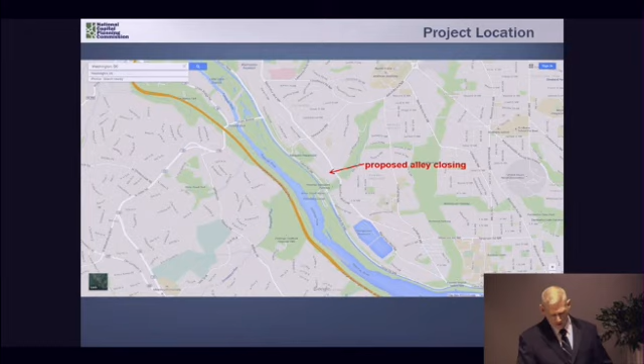The subject alley is unimproved as an alley, located in the Palisades area of Northwest Washington, a neighborhood that runs along the north side of the Potomac River, just north of Georgetown. This is an aerial of the proposed alley closing location, a neighborhood of single-family homes situated between MacArthur Boulevard and Canal Road. The alley specifically runs between Chainbridge Road and a portion of the rights-of-way of a former trolley that ran between Georgetown and Glen Echo, further up on the Potomac.

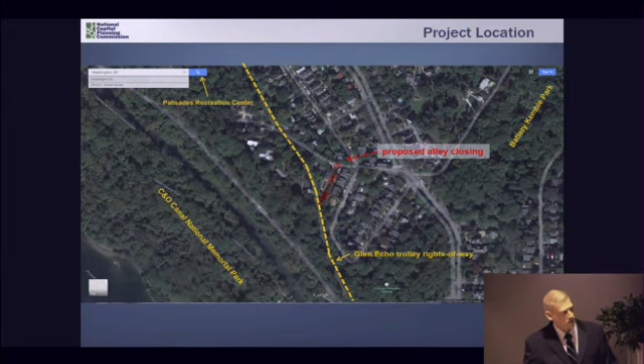This is another view, highlighting the trolley rights-of-way, which is district property, and its relation to the alley. While there are no federal properties adjacent to the proposed alley closing, the trolley rights-of-way currently provides an informal trail between the residential neighborhoods and the C&O Canal, as well as Battery Kimball Park, which are both national parks. The trolley rights-of-way also provides access to the Palisades Recreation Center, just off this aerial to the north.

Further, access to the trolley rights-of-way will not be significantly impacted, since, as I'll show in the next couple of slides, one can easily access it just a few hundred feet away on either Chainbridge Road or Sherrier Place. Finally, in terms of preservation of open space or green space, the alley today as a public rights-of-way could easily be paved over.

The closing of the alley will, however, allow the property to be incorporated into the adjacent single-family home properties. While the owners of these properties could do some things to reduce pervious surfaces or green space, they are still required to abide by regulations such as lot occupancy and setbacks, making it unlikely that this alley property will not remain open space.

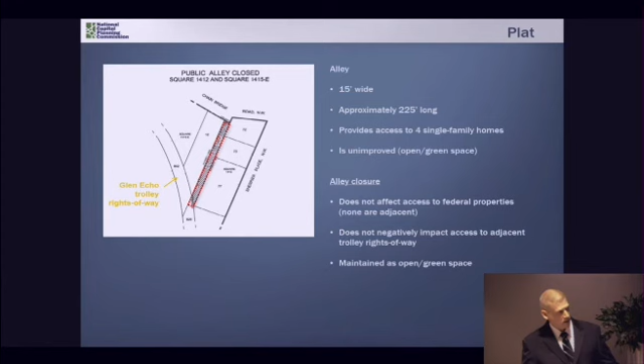So there is a lot of history associated with this proposed alley closing. However, we do have a number of people here today that will testify on this project, and we'll get into that history, so in the interest of time, I'm going to let them explain it to you.

However, from my recent observation, there's still a fence where the alley meets the trolley rights-of-way. This is an aerial view showing where the alley rights-of-way has been incorporated into the yard of the adjacent home. This is another aerial showing the same issue, if you can make that out.

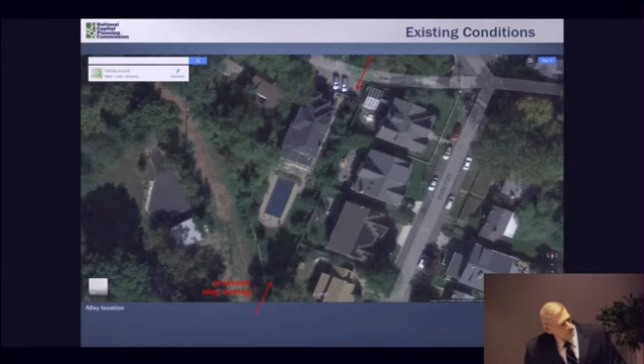So where's the fence? Can't see it. There's a fence on the lower edge where there's a red arrow, and there used to be a fence up on Chain Bridge Road, exactly where the other red arrow is. Can you go back to the last slide? Absolutely.

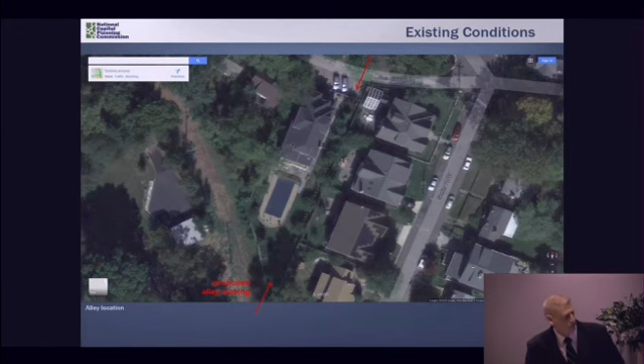Can you show us with a pointer where the other access points are? Or do they show up on this? I'll show you in the next slide or so. Okay, thanks.

And then this is just a view of the trolley right-of-way, about in the area where the alley meets it.

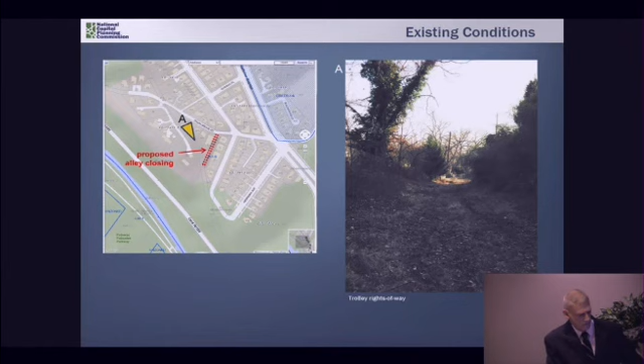And so I was just going to summarize on this slide. As I mentioned, there are no adjacent federal properties that would be impacted by the closure of the alley. Public access to the trolley right-of-way will not be impaired by the closure as well. And incorporating the alley property into the adjacent yards will tend to result in the maintenance of the current green character of the alley.

So it's with that the executive director recommends that the commission find that the proposed alley closing will not be inconsistent with a comprehensive plan for the national capital or other federal interests. So that concludes my presentation.

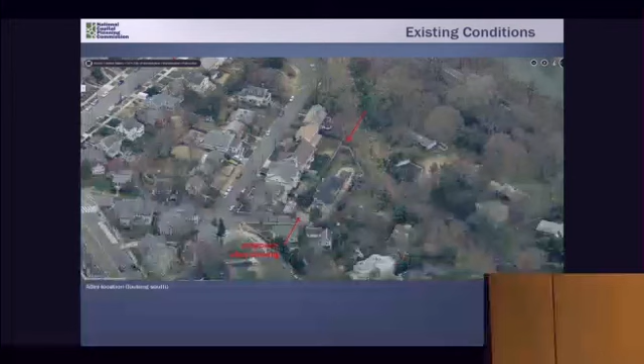Ms. White? I would just ask Mr. Hinkle to put the slide back up that shows the alley. I really appreciate the background from Commissioner Mendelson and trying to understand this situation. But it seems that the law for the closings are based on street or alley purposes. But what's fundamental to the discussion is how this was used as a trail connection. And is there a slide where it shows the trail itself or the alley itself? Because it looks... There we go. That's probably the best. Can you go back to the one before? What was the one before? Is that it right there?

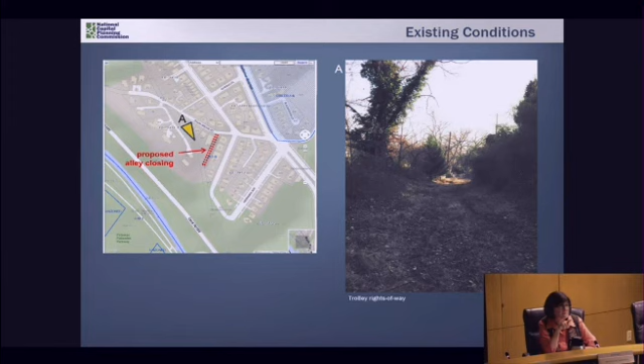We don't really have a slide of the actual alley to show how it's used. The reason I'm asking is typically with open space that's heavily used, and I understand it was unimproved, there's always a desire line and you can see where people walk. So I guess if this had come to us in the proper order, one of the questions I would have asked is how is this used? And I respect that the staff here at NCPC is always very thoughtful and looks to do their analysis on whether there's a federal interest in a very careful way.

But there's something about this that makes me look at this as I think the interpretation is a little bit too narrow and too specific, because this is a trail connection that appears from the testimony to be pretty heavily used by the neighborhood. I don't know for a fact, I haven't seen any data as to how this is used.

So from a precedent-setting perspective, it troubles me that we're taking away something. Put aside the background of how this happened or any personal benefit to the property owners, but I can imagine an adjacent property owner would never object to having control over open space. It's only a benefit to the private property owner. So while it has to remain open space, public access will be restricted to this alley, right? Correct. Okay, so to me that's a fundamental problem.

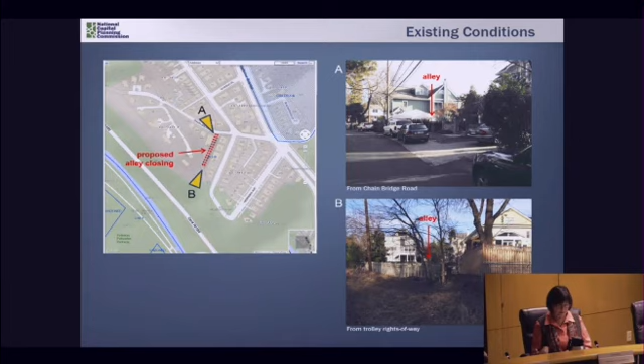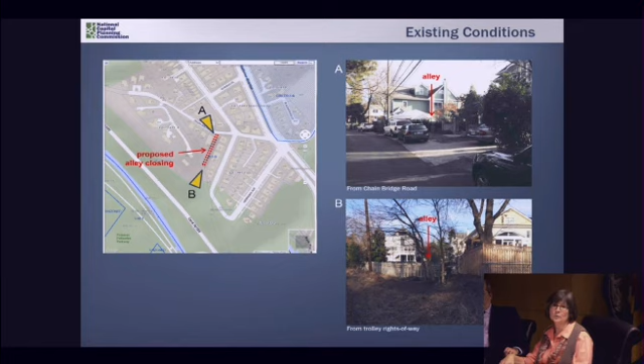And the fact that the fellow's paying a penalty, I appreciate the background on the value of the land. That's not the question for me, but there doesn't appear in any of the material that I read any plans to replace that land, whether it's as a trail connection or another open space in the neighborhood to even mitigate the impact of taking away the public land, right? Am I right in that, or did I miss something?

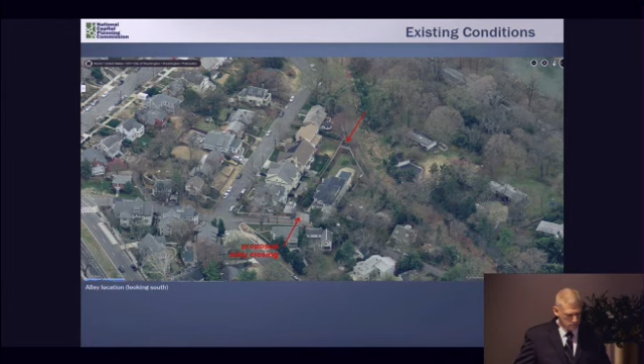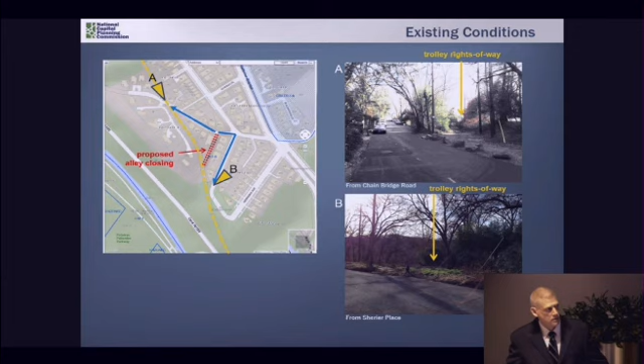So that would be point B on this graphic. And then there's also from Chain Bridge Road, which is marked as point A. The trail actually crosses Chain Bridge Road, so you can access the trail from that point. These are actually approximately about 150 feet away. It took me 1 minute to walk from where the proposed alley closing meets Chain Bridge Road, which is towards the north, to walk to point B and access the trolley right-of-way at that point.

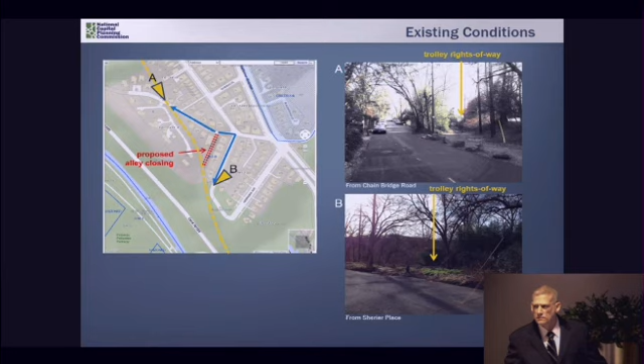Let me speak to that as well, if I may. There was conflicting testimony before the council about whether this alley was used as access to that trolley line, the trolley right-of-way. There was some testimony that there had been construction debris in there. The construction debris, if that's true, would have dated back to around 2008. And there was conflicting testimony whether it was used as access before then. Of course, before then, there were not the 4 houses that exist today.

I've been out there myself several times, and if you go to page 6 of the EDR, you'll see a photograph that's somewhat like what's being displayed. It's not a very great distance down Chain Bridge Road to the access point that I guess is A on what's being shown, and it's not a very great distance down Sherrier Place. And this is a very local area. People who are using there would be a few people from the neighborhood who would access the trolley line here.

There are many places along the length of the trolley line that people would access it. In other words, if you want to access the trolley line, you probably would not go to the corner of Chain Bridge Road and Sherrier Place. It would be the people who live in that immediate neighborhood who would be there. And it isn't a very far walk to either access point. But in any event, the testimony before the council was very conflicting with regard to whether people had in the past used this alley to access the right-of-way.

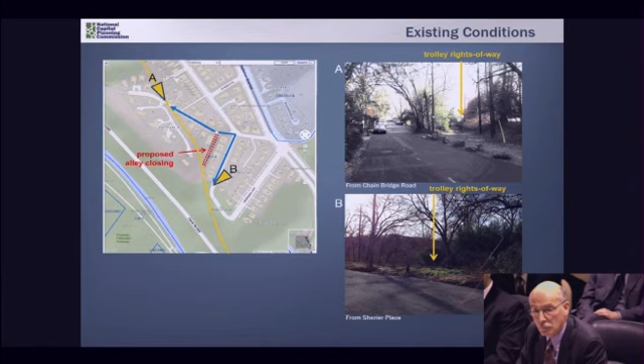What is the National Park Service interest? Generally speaking, what we see in green is close to the park service area, and the trolley line actually does cut through it, and we don't own that trolley line as it goes through the property toward Canal Road. So it's somewhat distant from the actual... You have no adjacent interest? It's not immediately adjacent to the alley, no. Okay, thank you.

Mr. May, did you have?

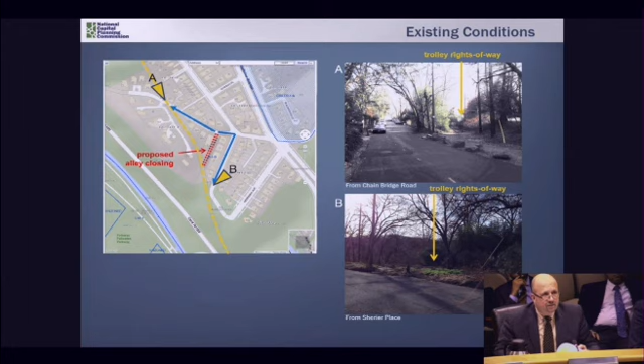As upsetting as it is as a resident to see something like this occur, to see somebody claiming public property for their own, that's not really the matter before us. The matter before us is whether there's a federal interest affected, and is there a reason for us to disapprove it based on some adverse impact on a federal interest. This isn't even a question of whether the council acted properly, although I appreciate understanding the case better as explained by Chairman Mendelson. It's very hard for me to see any adverse impact on a federal interest. I know it's proximate to parkland, but this was an alley.

It was a paper alley, but it was established as an alley, and the council's threshold is whether it's needed for alley purposes anymore, and the answer was no. This very well could have been a paved alley from our perspective, and if something happened there and there was going to be runoff onto parkland or something like that, maybe there would be some adverse condition we'd want to be prepared for. But that's not the case here, and I don't see any real potential for an adverse impact. Even if something were to grow out of the homeowner's use of that property, those are all conditions that would have to be mitigated anyway, for building code and environmental code purposes and so on.

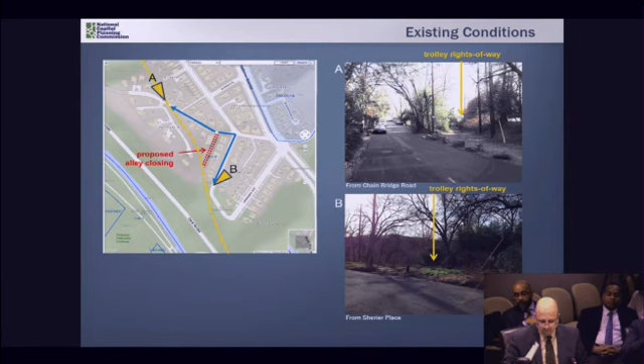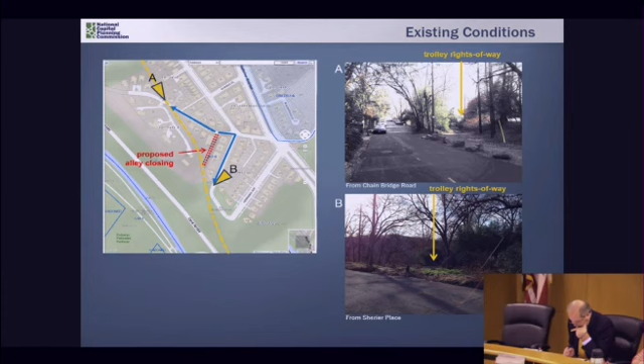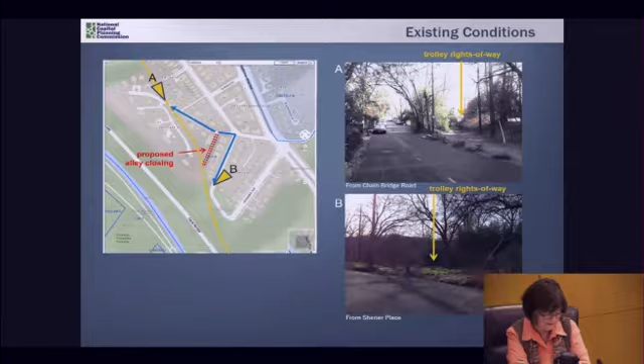I guess I just feel the need to make a statement looking at the EDR on page 5. Under analysis, paragraph 2, it talks about the federal elements of the comprehensive plan, including proposed alley closings within the district. The comprehensive plan within the parks and open space element does promote the provision and maintenance of public access to open space areas of particular interest or usefulness, with an emphasis on planning, completing, and maintaining connections between public parks and open space.

I appreciate what's being said here, and it's a value judgment, in my opinion, on whether there's a federal interest. I think what's troubling is that we talk about maintaining connections, and you are taking away a connection. I appreciate there's probably conflicting testimony about how that connection is used, but there's no data and there's no replacement. So based on that, I can't support the EDR, just on principle. I just wanted to make that clear.

Without further comment, is there a motion on the EDR? I'll move to approve the EDR. The EDR has been moved and seconded. Hearing no additional comment, all in favor of the EDR say aye. Aye. Opposed, no. No. One no, Ms. White. Abstain. One abstention, Mr. Dennis.

Thank you. The second item on our agenda is item 4B. Four B is the master plan for the Pentagon Reservation, and Mr. Carlton Hart is with us.

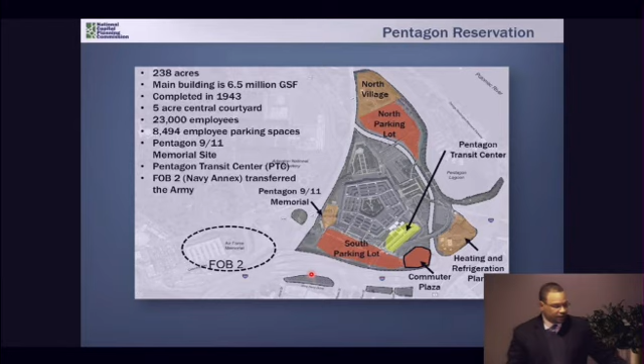The Pentagon 9/11 Memorial, which is to the west of the Pentagon building, and the heating and refrigeration plant, which is the power plant for heating the Pentagon reservation. I'll also note some parking lots that are south of 395 and south of the southern portion of the installation, and finally identify the area known as FOB 2, the Federal Office Building 2, also known as the Navy Annex. It was transferred to the Army and will become part of Arlington National Cemetery in the future.

The last master plan adopted by the Commission was in 2005. That master plan is shown here, and it had two main objectives: the first was to complete the permanent security perimeter for the reservation, and the second was to implement enhanced sustainable strategies to promote long-term environmental health of the reservation and its surroundings.

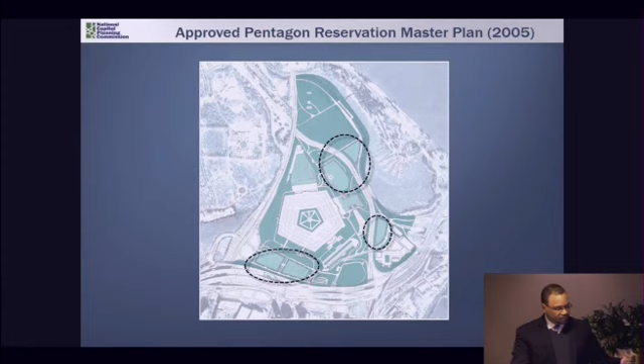The major moves in this master plan were the creation of parking garages, which I've highlighted and circled here. These were done in an effort to convert some of the land around the Pentagon into open space. The North Village and North parking lot were converted into green open space, and the top levels of the parking garages—1, 2, 3, 4 and 5—would also be made into green space with green roofs.

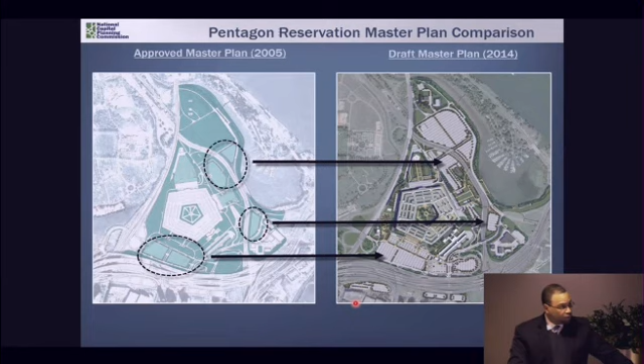The staff would like to note an easy comparison between the two plans. The major difference is that the Washington Headquarters Services, or WHS, is no longer proposing these parking garages, and instead is looking to use low impact development, or LID, to provide stormwater management. Because the parking garages are no longer being proposed, there were about 60 acres of additional open space with the green roofs and conversion of parking spaces that would not be included in the 2014 master plan. There are 6 acres of open space being proposed, which I'll discuss in an upcoming slide. I wanted to note that as the major change between the two plans.

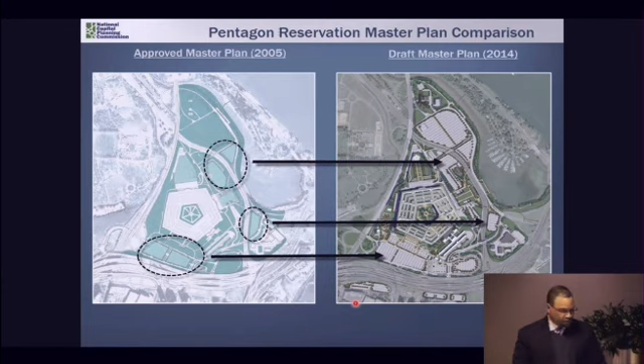The Commission approved the 2005 master plan a little less than 10 years ago. The comments the Commission made at that point are summarized here. The Commission approved the master plan but not the Transportation Management Plan, or TMP, because it did not meet the 1 to 4 parking ratio required for this facility. The Commission required DoD to submit a revised TMP showing how it would meet the 1 to 4 parking ratio, or explain why it could not be met.

Staff notes that a new TMP has been submitted with this draft master plan, and the 1 to 4 parking ratio is not met in the new TMP. There is a short explanation about what the new proposed parking ratio is going to be, and I'll describe that in an upcoming slide.

The Commission supported and commended DoD for reducing impervious surfaces in the 2005 plan by replacing surface parking with parking garages, and requested that the phased planning to convert the north parking lot to open space be moved to an earlier phase. There was phased planning associated with that 2005 master plan, but unfortunately the WHS is no longer pursuing these parking garages, due to cost and budget constraints.

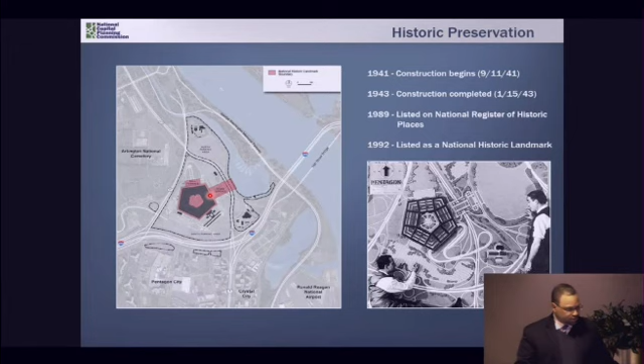Just to give you a little bit of some long views - understanding that views of the Pentagon are important, and obstruction of these views is something that WHS seeks to minimize, to protect the integrity of the historic resource.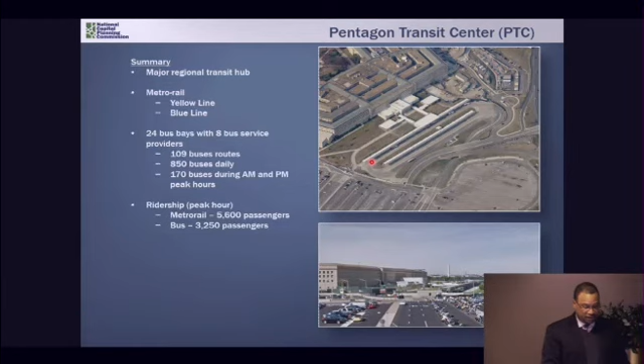For the roadway network around the Pentagon reservation - I-395 is directly to the south of the reservation. To the west is Route 27, or Washington Boulevard. Cutting through the reservation is Route 110, which connects down into Crystal City. And then to the far east is the George Washington Memorial Parkway, which is a National Park Service property.

Some local roads as well connect north and south, as well as connecting to Arlington - Joyce Street, Hayes, Fern, and Eads Streets. There is another local road that actually crosses through the Pentagon Reservation, and that's Boundary Channel Drive. It connects underneath 395 to an Arlington County park known as Long Bridge Park, which has been partially developed with recreation fields on the southern portion, and an aquatic center being planned for the northern portion.

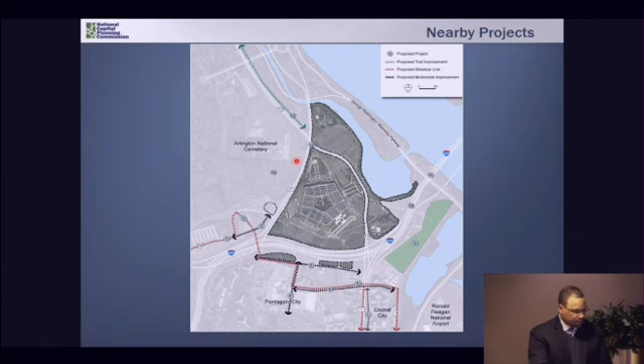And I also - I've already mentioned the Arlington National Cemetery master plan that has been submitted to the commission.

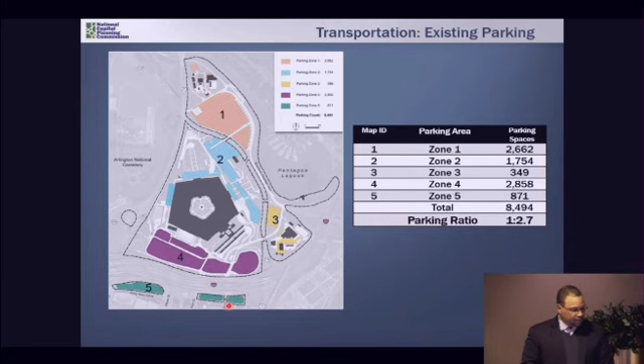Before we move on, let me ask a quick question on parking. Going from 1 to 3 to 1 to 4, the 1,295 spaces, is that based on the 1 to 3, or is that assuming the 1 to 4?

The 1,295 is actually less than that. They haven't given us what the 1 to 4 is, but we can calculate it, and I have calculated that. That's more like 2,700 parking spaces that they would need to go down from the existing 8,500. What they are doing is going down to almost 1,300 parking spaces, which will get them to a 1 to 3.2. So they won't actually get to the 1 to 4 even with the reduction they are proposing now. Okay, I see.

For the existing parking, another piece that WHS has noted is that the Pentagon does do some event staging, and these large parking lots are used for events such as Rolling Thunder, the Marine Corps Marathon, and the presidential inaugural parade setup. So there are some reasons why the Pentagon is looking at maintaining some of these large areas for those events.

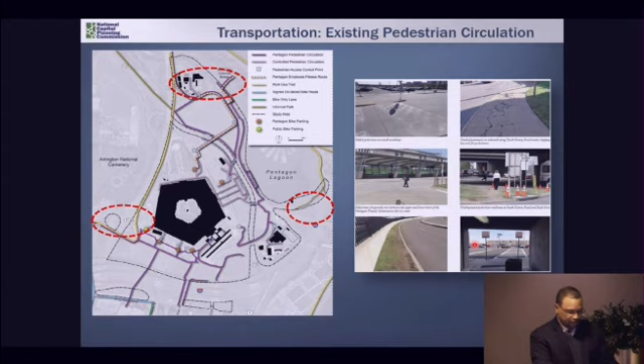This image is just showing the poor pedestrian amenities and conditions that currently exist at the Pentagon. Again, that was one of the main points for the master plan update: to improve pedestrian connections and make them safe, as well as improving some vehicular conflicts.

For the draft master plan, similar to the 2005 master plan, the 2014 draft is intended to improve security, enhance environmental sustainability on the reservation, and enhance the quality of life for employees, as well as address accommodations for visitors to the Pentagon and other public facilities on the reservation grounds, like the 9/11 Memorial.

These projects are being proposed in an effort to balance the various planning factors on the reservation, including funding, security, safety, public access, historic preservation, neighborliness, and sustainability.

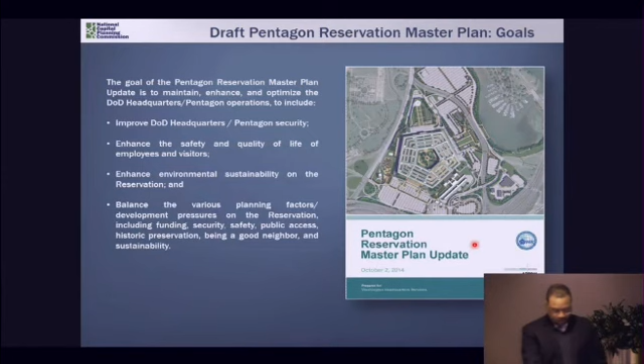These 22 projects are separated into a few topic areas. Some are security projects, some are environmental and sustainability projects, some are quality of life projects, and they include things like pedestrian and bike improvements, vehicular safety improvements, and infrastructure and support improvements as well.

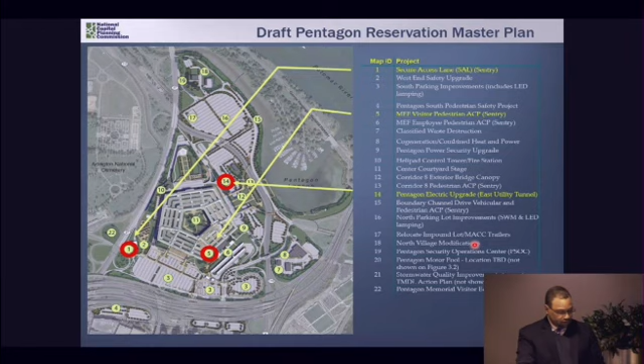In an effort to summarize the master plan, I've looked to combine the staff analysis with the master plan, so I'll provide some commentary on these elements as we move through. I've also discussed the previous commission action fairly early in the presentation. The comprehensive plan compliance is really focused on the one-to-four parking ratio, as well as environmental protection of sensitive areas, and I also talk about some specific projects in a little more detail.

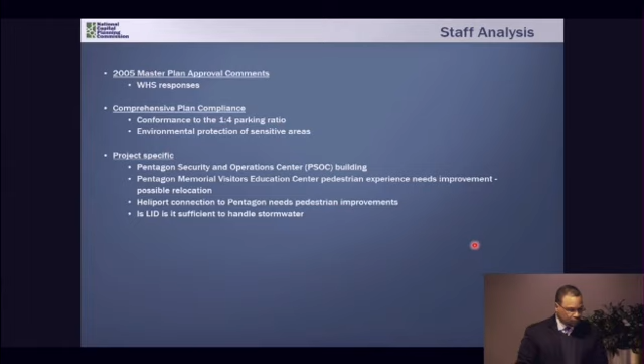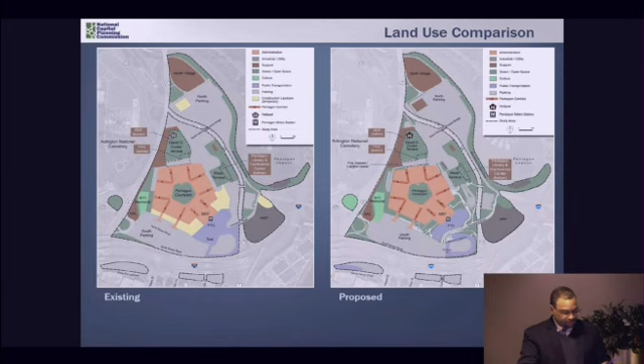The other change is around the commuter plaza, which I was talking about earlier. There's a routing for buses and cars that has been proposed for the master plan that will make a fairly significant change in that location. For transit, I'll show in the next slide what the commuter plaza will look like, since that's really the main change, down in this location.

This image shows the change being proposed. Currently the buses, as they move through, come off of 395 onto Eads Street, and when they move through this area there's a conflict point, as well as a conflict point with pedestrians needing to cross from the commuter plaza to the Pentagon Transit Center, or the PTC. The Pentagon WHS is looking to separate these two things, having the buses route around and then underneath to the PTC, while cars would move through here and into this area to drop off and pick up passengers, then go back onto 395.

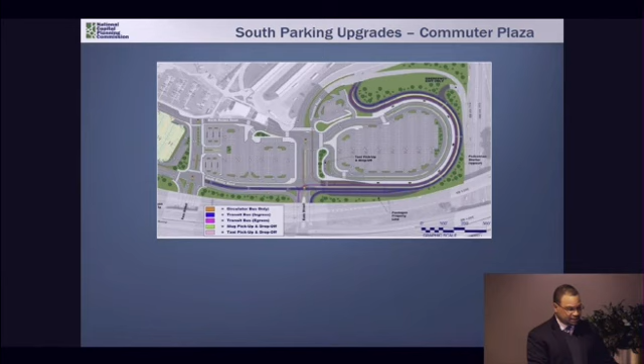There are quite a few pedestrian amenities as well, better crosswalks, more clearly delineated and defined trees, and landscaping that's included. There's also some LID proposed for the project that would be included in the plan.

For the pedestrian and bicycle amenities, the major changes are the connections I noted before. There's now a connection between the Mount Vernon Trail and Boundary Channel Drive, a public connection across this bridge onto Lady Bird Johnson Park, and a realigning of the connection along Route 27 for a multi-use trail that currently exists. The plan also includes better circulation for employees wanting to fitness train, since fitness is a big aspect of life at the Pentagon, and also for bicycles moving around the installation.

We're looking at installing bike lanes and on-street bike facilities as well.

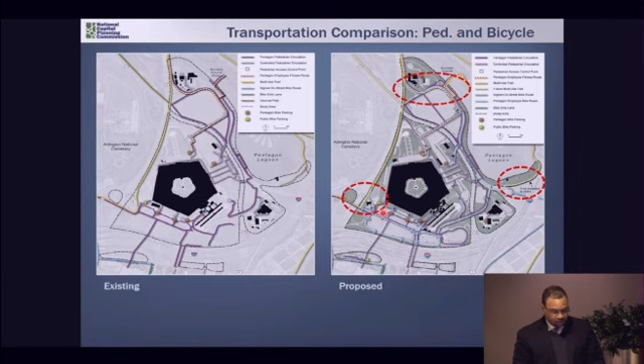The Virginia Department of Transportation provided comments on the master plan, noting among other things that a connection between Lady Bird Johnson Park and Route 27 for pedestrians is something that should be pursued. Also, the identification of the Pentagon Memorial Visitor Center, located here, and I'll discuss that in an upcoming slide—connections and pedestrian access to that, and the siting of that, was discussed in the comments from VDOT. The full comments from VDOT have been provided and are in an appendix at the back of the EDR.

The draft master plan is proposing an improvement to the parking ratio, and Chairman Bryant, your question was here—this is what they are looking to do. The existing ratio is 84.94, and the proposed under the master plan in the 20-year horizon is 71.99, so there is a reduction in the number of spaces. That reduction is basically in the south parking lot, and you can't read the numbers here, but it's because of some of the pedestrian amenities being proposed, as well as the reconfiguration of the commuter plaza. There's also a change in the Army Navy Drive parking lot on the west side.

The Army, or WHS, is proposing a tour bus drop-off for visitors to the 9/11 Memorial at the Pentagon at this location. There's an underground tunnel that connects under 395, and the 9/11 Memorial is located in this vicinity.

In neither master plan does WHS propose to meet the 1-to-4 parking ratio, and I wanted to make that clear. WHS's explanation is that they're thinking they're more similar to other federal installations in the suburbs near transit, which under the comp plan would require a 1-to-3 parking ratio. In the comp plan, all of Arlington County is considered part of the historic District of Columbia boundary, so it's within the diamond.

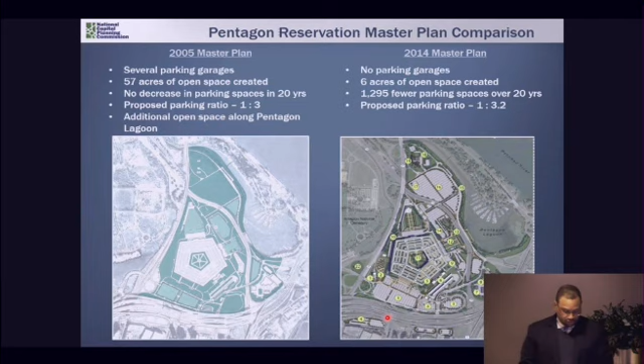Staff doesn't agree with the statement that it needs a 1-to-3 parking ratio, because as I noted earlier, there is significant access to transit as well as a strong transportation infrastructure at and around the Pentagon, which will accommodate alternative modes of transportation to commute there. These reasons provide strong justification for the 1-to-4 parking ratio stipulated in the comp plan.

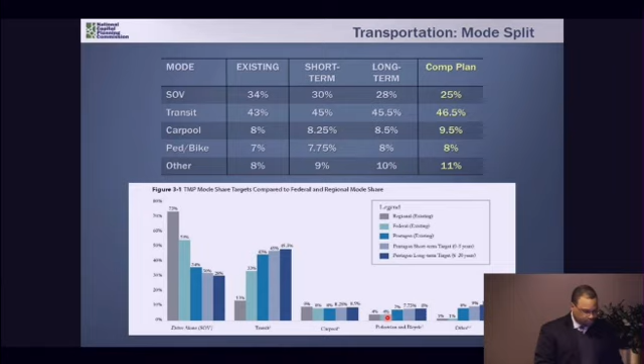The Washington Headquarters Services does provide information about their mode split. Staff understands that the Pentagon has already developed ways to promote alternative commuting, and we applaud them for doing a pretty good job so far. It has one of the lower single occupancy vehicle, or SOV, mode shares.

On this chart, the blue middle line is what the Pentagon provides now. The line directly to the left is what general federal facilities provide, about 54% SOV, and the region as a whole has an SOV of 72-73%. So they're pretty low with respect to that, but the comp plan is looking for them to reach the 1-to-4 parking ratio, which would mean an SOV mode split of 25%. Staff has provided what that mode split might look like, showing the 25% and the other corresponding splits.

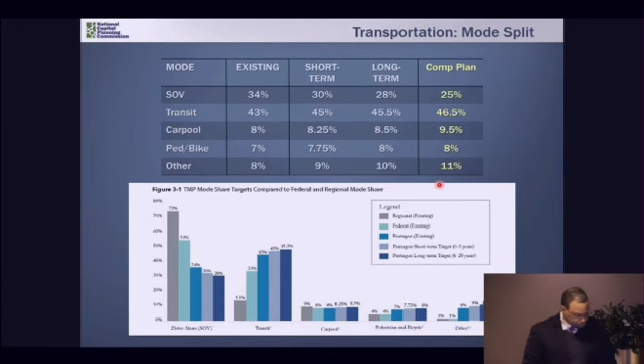WHS is also proposing to implement a number of low-impact development measures around the reservation in an effort to reduce stormwater impact on the Pentagon Lagoon, the Pentagon, and the Potomac River. WHS notes these measures will allow the Pentagon to conform with applicable laws such as the EISA and Executive Order 13514 and others.

The master plan did not describe how these measures would be as effective as those in the master plan approved in 2005, and staff would ask that we understand the difference between the two master plans. There were nearly 60 acres of open space proposed in 2005; that's gone down to 6 acres of additional open space conversion, and staff would like to understand what that difference will mean in terms of stormwater protection or management.

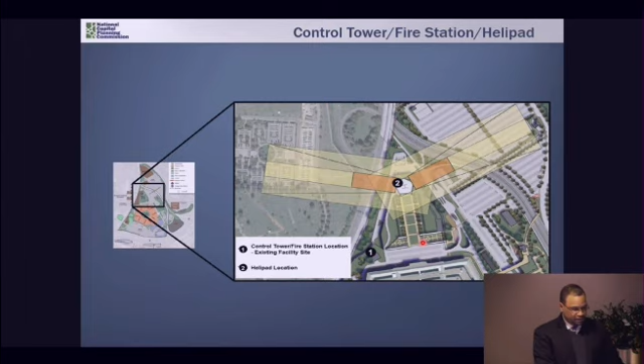For the next few slides, I'll discuss the proposed projects around the reservation in more detail. WHS has proposed a new control tower and fire station for the helipad located north of the Pentagon. While supportive of the project and its location, staff would recommend that WHS explore a better pedestrian connection—there's a parking lot to the south of the helipad—making a better pedestrian connection in line with other pedestrian improvements around the Pentagon, and address that in the final draft master plan when it is submitted to us.

The applicant has also proposed the Pentagon Security and Operations Center, also known as PSOC. This 26,000 square foot facility will be the home of the Pentagon Force Protection Agency. It will house a gun range, K-9 facility units, and other support facilities.

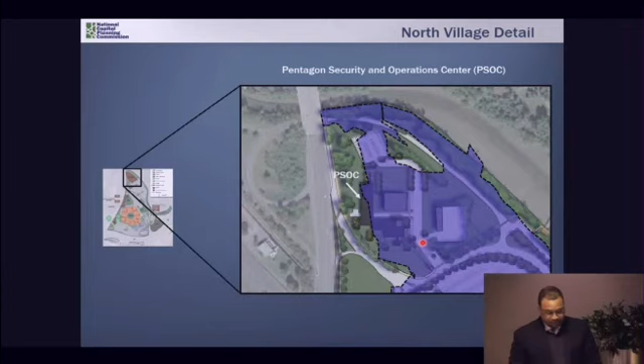Staff understands that the facility will be constructed, as I noted earlier, in the 500-year floodplain, and staff would like to understand if this facility can be sited to reduce its impact on the floodplain, or sited in a different location on the reservation to protect the sensitive floodplain area. Along with that, staff would also like to understand how WHS plans to protect sensitive areas on the reservation, particularly the 500-year floodplain.

I spoke earlier about the 2005 master plan that had removed a lot of the impervious surface here, as well as the support facilities up on the North Village and the North parking lot. Since these conversions are no longer in the plan, staff is interested in understanding how these areas will be protected through the use of low impact development. I'd like to note that we do support the removal of the 1,300 spaces proposed in this draft plan, and encourage the applicant to explore removal of additional parking spaces, focusing on protecting environmentally sensitive areas, in order to help WHS meet its 1-to-4 parking ratio goal.

And so with the removal, if there could be additional removal of parking spaces, there's a way to do that in the north parking area. That's what that kind of boils down to.

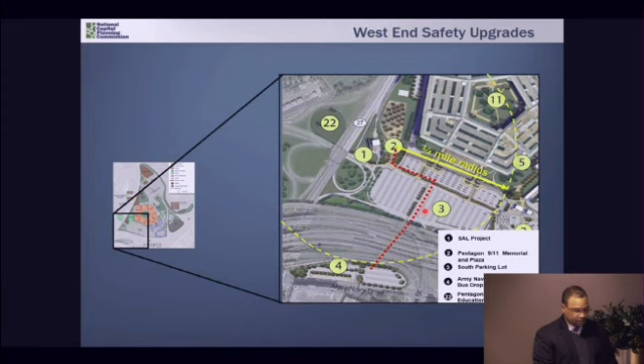And for that reason, we would like to work with the Washington Headquarters Services to see if we could find possibly an alternative location for this center that is more appropriate, either in closer proximity to the site, or the bus parking area, which is to the south here, to improve the visitor experience to the 9/11 Memorial. So co-locating what is being proposed here, down here possibly, is a possibility in the future, but we look forward to working with the Washington Headquarters Services to determine that.

And with that, it's the Executive Director's recommendation that the Commission support the draft 2014 Pentagon Reservation Master Plan goals of improving security, enhancing pedestrian amenities, reducing vehicular conflicts, and enhancing environmental sustainability at the Pentagon Reservation, and notes that no parking structures are included in this draft master plan.

Also notes that the 2005 master plan did not propose a reduction in the number of vehicles, but did increase the amount of open space. The 2014 plan proposed a reduction in parking spaces by almost 1,300 spaces and increased the open space by 6 acres.

Also notes that while the draft 2014 master plan proposed a reduction in employee parking, it does not reach the applicable comprehensive plan parking ratio goal of 1 space per 4 employees, and therefore requests that the applicant work with NCPC staff to identify locations for additional long-term opportunities to eliminate parking, preferably focused on locations that would increase open space within delineated floodplain areas north of the Pentagon Reservation and in proximity to the Potomac River and Pentagon Lagoon.

And we provide the following comments on the draft 2014 master plan and request that the applicant address these comments prior to submitting the final master plan for commission review.

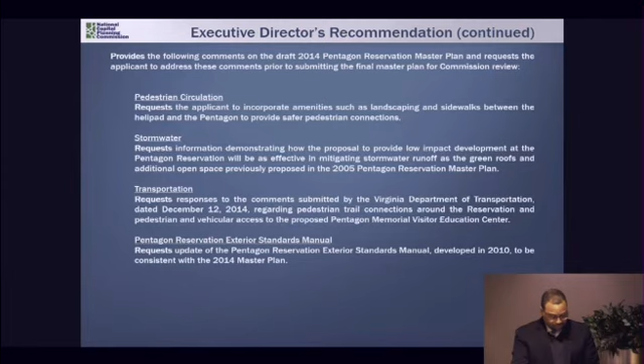For transportation, request responses to the comments submitted by the Virginia Department of Transportation regarding pedestrian trail connections around the reservation and pedestrian and vehicular access to the proposed Memorial Visitors Education Center.

Regarding the Pentagon Reservation Exterior Standards Manual, request an update to the manual, developed in 2010, to be consistent with the 2014 master plan.

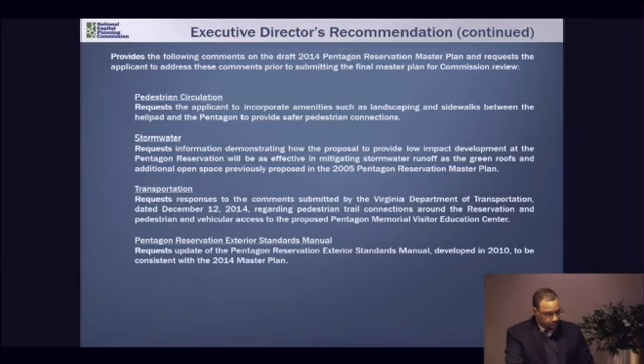Finally, request that the applicant provide analysis and documentation describing the proposed siting of the Pentagon Security Operations Center building within the 500-year floodplain rather than another location on the Pentagon Reservation.

And the last recommendation is to request that the applicant work with staff on identifying and analyzing alternative sites for the Pentagon Memorial Visitors Education Center to find a more appropriate location in closer proximity to the memorial, or co-located with the proposed tour bus drop-off area along Army-Navy Drive, in an effort to improve the visitor experience, and do that prior to submitting the final master plan for commission review.

And with that, I conclude my presentation. Thanks. Thank you, Mr. Hart.

As noted, this is in draft form, and the question before us is to approve the comments back to Washington Headquarters Service in preparation for their resubmitting, or submitting to us, the final plan in a few months.

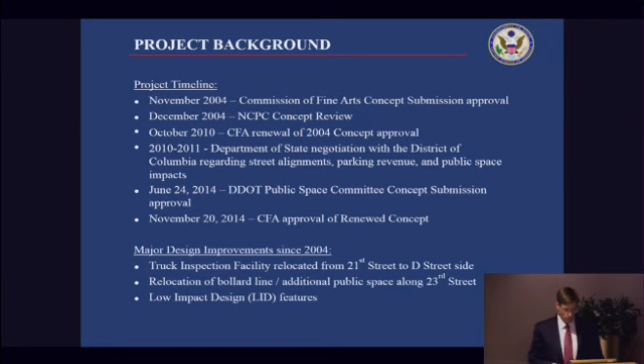So the people we've really been coordinating with on the district side have been the Department of Transportation, the Office of Planning, the State Historic Preservation Officer, and a couple of other district agencies. But the Office of Planning, DDOT, and SHPO have really been the main three players involved in the process for the past 10 years.

Listing under the federal agencies, it's really been a conglomeration of neighbors, review agencies, and interested stakeholders. The National Park Service, as part of this, is actually willing to allow us to use a portion of Reservation 104 for the truck inspection station, so they've been a major player in the consultation that's been ongoing.

Some of the ones not yet listed are the community agencies. The American Pharmacists Association, as a neighbor, has been actively involved. So has the Foggy Bottom Association. It's been a pretty healthy consulting group.

To define the project area, our Harry S. Truman Building is bounded by 21st and 23rd Streets Northwest, by C and D Streets. It does have linkages to the E Street Expressway, as that off-ramp links to what is remaining of D Street. Virginia Avenue has a small linkage up at the northeast corner adjacency.

And in this chart, we've also shown 22nd Street, because as we've made suggestions to close the C and 22nd Street intersection, it does impact how vehicular traffic will circulate on 22nd Street between C and Constitution Avenue.

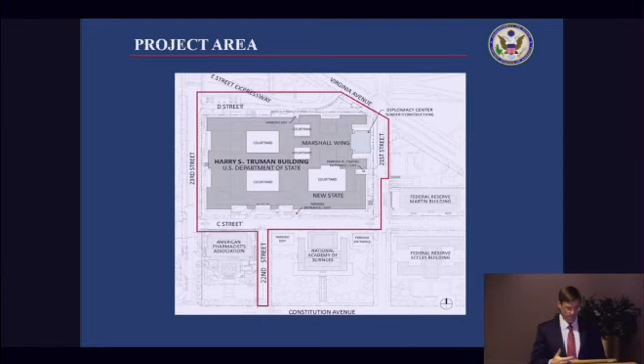In the 2004 concept, I think we had 7 phases, and some of those phases had multiple parts, so it starts getting confusing as to how many increments we were trying to break up the project into. That added significant confusion as to what we were trying to accomplish. I think what we're proposing today is much more direct, complete, and a clear separation of work. So what's shown in orange is basically all the streetscape and everything we're including as phase 1.

Work in the public space includes a security pavilion at the D Street entrance, vehicular inspection stations at the intersections of 21st and C, 23rd and C, and 23rd and D Street. One of the things previously in a phase but currently under construction is the U.S. Diplomacy Center, at the entrance to the old war portion of the building, in the northeast quadrant.

The 3 remaining items in blue are security pavilions designated as phase 2 work. We're trying to show as best as possible what our intentions are, but we haven't started a design process to put those concepts to paper. It's our intention that everything we complete with the D Street Pavilion would be representative of the other entrance pavilions. The only concern is the C Street entrance and its ceremonial functions - whether what's currently programmed for D Street is still appropriate for C Street, but that would be part of a later consultation.

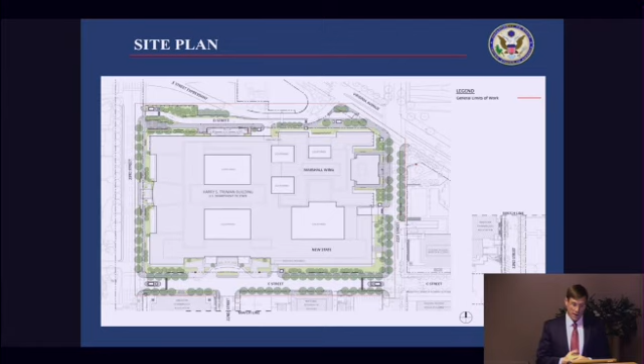Compared to the site plan shown previously, a blue line has been added to identify where the vehicle barriers are. Our objective from the State Department's security needs is a vehicular restriction, not pedestrians or bicycles. As we've developed our concept, one of the goals is to make sure pedestrians and bicycles have free access through and around the property. If anything, where we can, we've tried to make changes that would improve that experience. I'll point out some of those in a little bit.

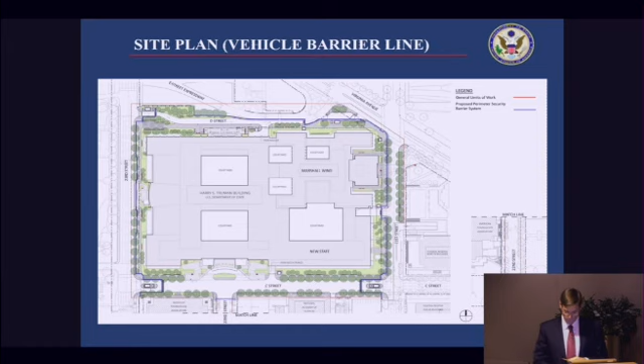Our next slides try to show these changes street by street. What's shown at the top is the 2004 design plan presented to NCPC. In the middle is the 2014 design presented at Commission of Fine Arts back in November. At the bottom, you'll see an elevation of the current design. I hope you can see the section marks in the middle, so that the slides coming later, regarding 21st Street, show where we've taken sections through the plan or tried to show renderings at certain locations.

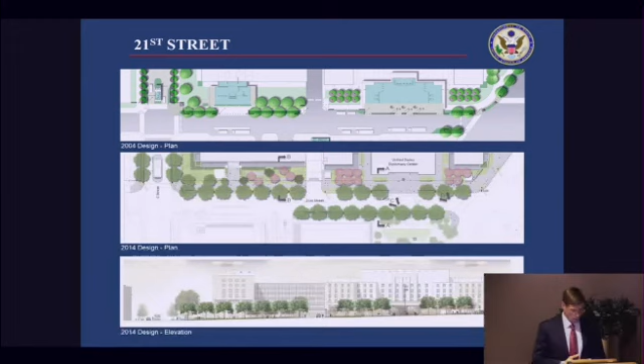This is our first cross section, technically through roughly the center of the U.S. Diplomacy Center. You can see the flag pole that's somewhat shaded on the left as a reference point. On the eastern side of the street, in front of the National Park Service Park and adjacent to the Federal Reserve buildings, is the existing sidewalk, anywhere between 4 and 6 feet. It's our intention to widen it to 10 feet, and to make the tree planter bed 6'4" or so, so that the trees that are either planted or existing have a viable chance to grow.

We've agreed with the district on a quantity of lanes that match what's existing, staying southbound in orientation. Directly in front of the Diplomacy Center, we've proposed a 6-foot tree planter bed, some public benching for people to sit and rest, a sidewalk of 10 feet in width, and the remainder is the dimension to the face of the Diplomacy Center.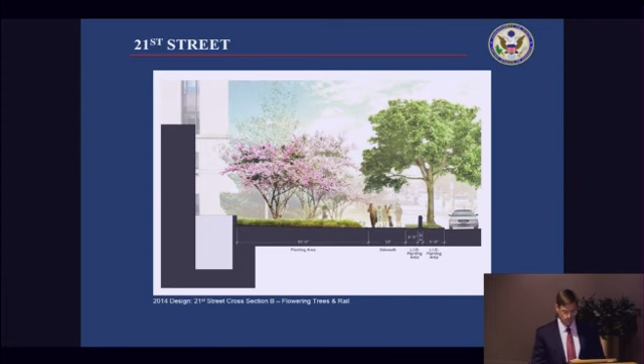This perspective shows those concepts in a three-dimensional reference. We do think it improves the circulation as compared to what's currently there, and provides LID opportunities that presently don't exist. The final rendering on 21st Street is looking south from the Virginia and 21st Street intersection towards the mall.

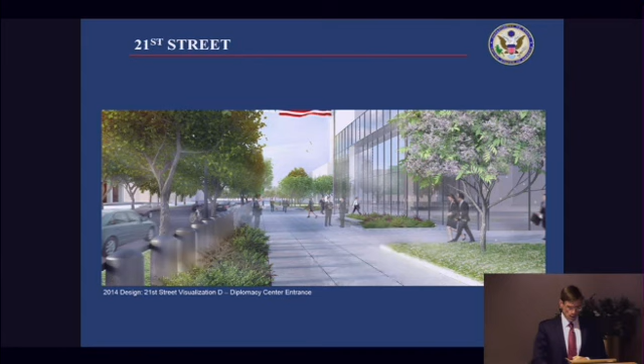The next street I'd like to go to is C Street. Back in 2004, we had a divided lane with a median and a rosette type feature in front of the C Street entrance. I think the response we received over the past 10 years was that it wasn't typical of a DC street, so we've made changes to revise that and make it more typical in case the perimeter security was no longer ever needed.

One of the other things we've changed is that there was a previous ellipse towards the southeast corner of the Harry S. Truman Building. You can see in the middle section that that portion is now being reclaimed and vegetated.

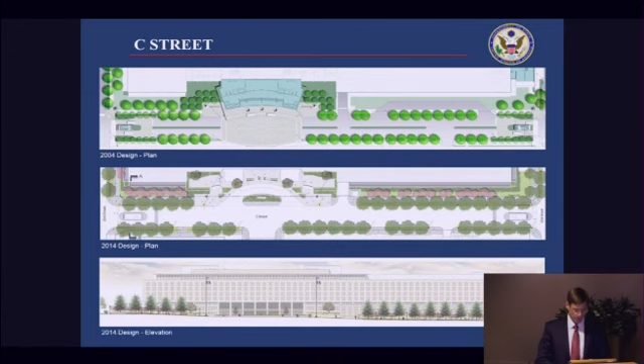I also have one cross-section, the next slide, through the vehicle inspection station at the intersection of 23rd and C. It shows still 10-foot sidewalks on both sides of the street, and the process of the vehicles in terms of being inspected inbound and then outbound.

We consulted quite extensively on 23rd Street as well. The original concept had all the barrier systems 2 feet from the curb on the sidewalk side of the street. What you'll see in the upcoming elevations or cross sections is that the barrier line is now separated either at generally 6 feet or 10 feet. So one of the things we've agreed to with the district is where we can add space between the curb and the barrier, we've incorporated that into the design.

One of the things the district has done is made a decision that rather than maintain the existing location of the curb, it would be more logical to align the curb on 23rd Street in front of Harry S. Truman with the curb as it exists in front of the American Pharmacists Association. So as you travel north on Constitution, you won't see the current road width change that takes place. It's presently 56 feet between USIP and APhA, jumps to 66 feet over the E Street Expressway, and compresses back to 56 feet as you approach George Washington University. This will align the road, at least on the eastern side in front of HST, and that curb alignment will permit more distance between the curb and the barrier systems we're proposing on 23rd Street.

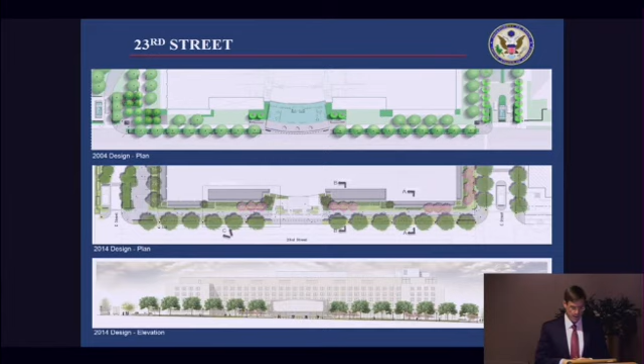This is a cross-section on 23rd Street. It shows a wall and bench that we're trying to include. As I mentioned earlier, in this location the distance between the curb and the barrier system is close to 7 feet. It includes an LID planting area that we've tried to maximize in size, and a 10-foot sidewalk for pedestrians and bicycles. The existing sidewalk is either 8 or 9 feet, so by making it more per the district standard, we believe we've improved the pedestrian experience.

Difficult to see, I'm working very hard. Is that the bench, the little black one? Is it behind the guy with the shoulder strap to the right? That little bump? Yeah, that's correct. He's got a white shirt on. He's standing, looks like he got tired and started to walk away. Not a very comfortable bench.

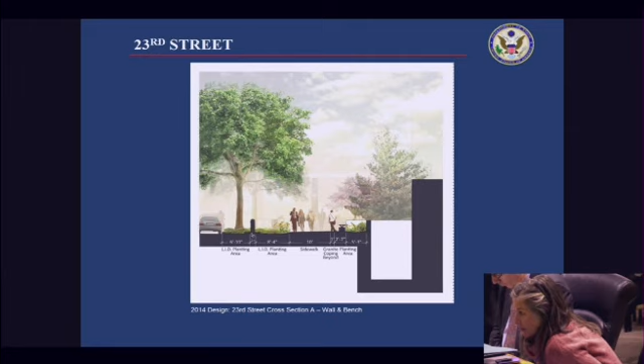So, David, the wall you're referring to, I'm assuming, is to the right of the 5'3" demarcation point—you give a dimension to the very right before the moat of sorts. Correct, that is a building moat that surrounds HST. The 5'3" is the dimension from where the moat stops to where we're going to be able to place this bench. So what I'm asking is, when you refer to wall and bench, is the wall actually part of the moat? I'm having trouble with it in section.

I may have a better example of wall and bench on the next slide. The barrier systems are meant to restrict vehicular movement, not pedestrian movement. What we've been using as the barrier system is our description of bollards, walls, and rails meant to control where pedestrians try to cross the street, and in some locations they're actually walls that have a multi-purpose. On the next slide, you can see the person actually sitting on the bench.

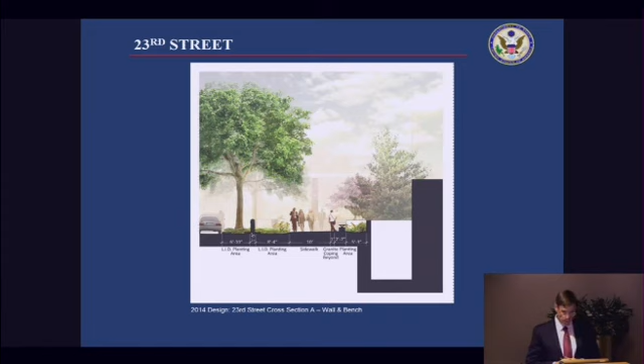In this location, we're proposing to use a wall that internally has a bollard as a vehicle restraining device, but it also serves the dual purpose of being the back of a bench when someone is resting. So it's not meant to confuse, but there's a range of treatments we're using to provide vehicular restrictions without impacting pedestrians as much as possible, while also giving opportunities for features to serve more than one purpose.

So do you have a plan detail that codifies where you're using which form? Yes, though I don't have that as part of my presentation.

One of the things we went through as part of the consultation was the percentage mix of bollard, wall, and fence. The district was fairly clear that they wanted to minimize the use of walls and keep it as open as possible. We might have started at a 40-30-30 mix, and it's gotten significantly less, where the wall treatment may now be 15%. The rail treatment is also a little less, with the purpose of the rails being to make sure people don't fall into the LID that's being planned, or that they're not crossing where you don't want them to—like on 23rd Street, where people are going 40 miles an hour.

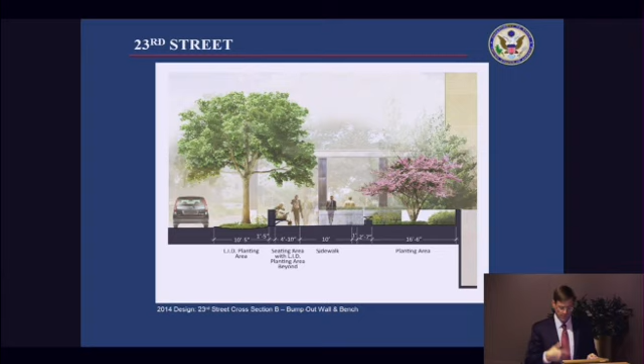Just not to skip over this cross-section, but it's trying to show the bench built into the wall, and also how it interacts with the Dean Acheson entrance on 23rd Street.

That would have been completely hardscape between the curb and the barrier. Now the only locations where it's fully hard are the cuts the district wanted, to make sure people could get through the barrier system at some regular interval, nominally 35 feet.

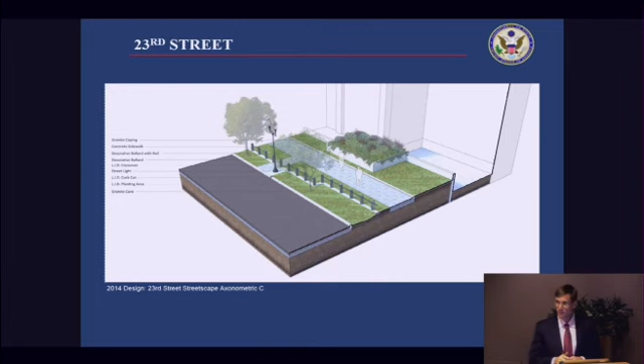The next comparison is D Street. I think this is probably pretty significant, specifically as it relates to the truck inspection station. The right-hand portion of the work is essentially the same. There's still a vehicular inspection station at the entrance of the D and 23rd Street intersection. It's the State Department's intention to have shuttle buses that route through the city and drop off people here.

In the middle iteration, we've changed the connection between the E Street Expressway so that a truck or vehicle coming off the E Street Expressway will need to merge with our shuttle bus traffic coming off the restricted D Street, and then either make a connection to Virginia Avenue, or if it's a truck, come into our inspection station just to the left of these two little trees that are kind of bumping out there.

I don't have a good way of pointing them out. What's drastically different for us in the truck inspection station is that our queue on 21st Street is essentially about 12 vehicles, depending upon the length. What we're looking at here is really no more than 3. So one of the things we're going to have to do is come up with a much better way of scheduling and controlling trucks.

In the event that the truck inspection station is full, we do have a plan, a map that shows how a truck would make a return leg to the inspection station. It's at best 1.5 miles, or on another alternative, 2 miles. So on our end, in terms of being good schedulers of our loading dock capacity, we're going to have to make sure that the truck inspection station is managed properly.

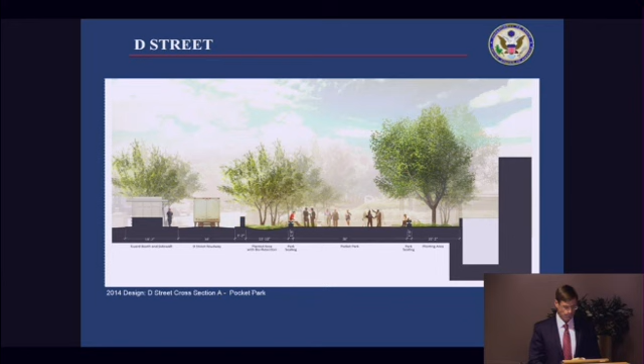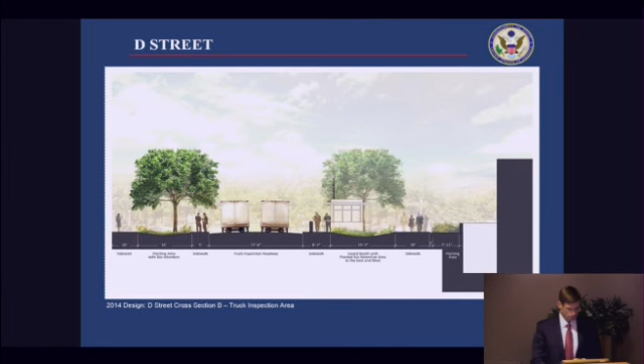And then the other cross-section we have is at the truck inspection station closer to Virginia Avenue and 21st Street. This next visualization is of the Pocket Park that I was trying to describe at D and 23rd Street's intersection.

The last perspective I have is of the D Street Screening Pavilion. This is something we consulted with the Commission of Fine Arts on several occasions. The roof line was changed in response to their comments at the end of 2010, and this is the perspective and plans that they've seen in November 2014.

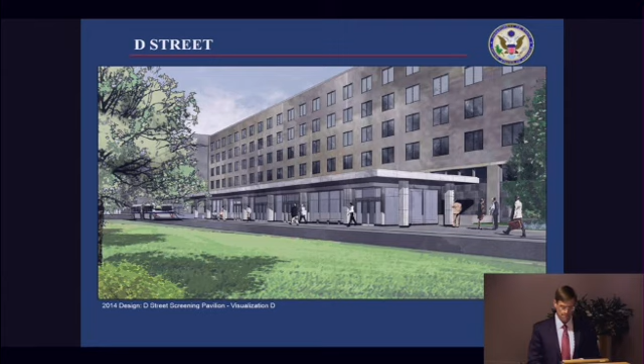Just to give you an update of our schedule, as Michael had said, it's our intention to try to be back here with a preliminary review, much more detailed, in May or June of this year. We're trying to finalize a draft EA to put out to public comment again. We think we've gone through consultations enough and have a design which meets our security objectives and reflects the consultations we've received from district agencies and federal review agencies as well. I'd use some of the language the Commission of Fine Arts gave, in that they endorsed our proposal as well-integrated and a seemingly effective response to a highly complex problem. So their comment was appreciated.

I think we've gone through a lot of work to try to make sure that what we were proposing met our need, but still could be of benefit to the pedestrians, bicyclists, district residents and visitors. Our timeline reflects that we were willing to work towards a project which met as many goals as possible, not just taking the first solution and implementing it. So we think at this point our concept is good, and it's been supported by Public Space Committee and Commission of Fine Arts within the past 6 months. This is my last prepared slide.

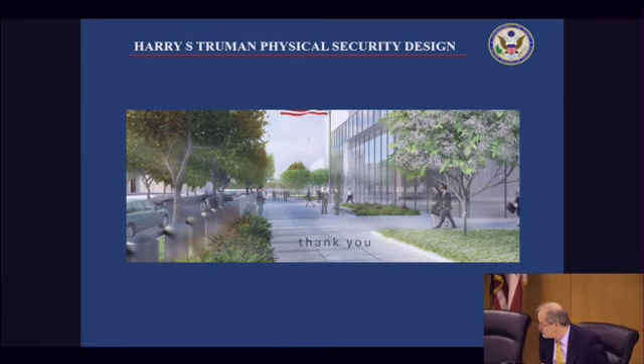I have one question, and I may have missed it because I wasn't paying attention. Are you cutting into the curb for stormwater management at all? I mean, into the actual curb? We have solutions that would divert water that's in the gutter pan into the tree box. Those haven't been finalized yet with the district. Is that what you mean in terms of cuts to the curb?

Well, I'm just asking. I know we had a lot of back and forth on Commerce on this subject about cutting into the curb, so stormwater could then be collected that way, and I didn't notice it, but I couldn't see because of the detail. We didn't provide that level of detail. We've talked about it, but haven't finalized the design really for one issue: the slope of 23rd Street is much more significant than C and 21st.

And in the other solutions that we've seen around the district, some have actually included water diverters to push water into the tree boxes, and they tend to be little asphalt blobs stuck into the gutter pan after the fact. So we think there might be better opportunities on C or 21st where the slope is less, to naturally collect the water because it doesn't have the same velocity it might have on 23rd Street.

And my other question was, how many seating arrangements—well, it's not like a formal living room—how many benches do you have in the whole design? Do you know? I don't know off the top of my head, but I could provide that. Because I'll probably grill you on that when you come back, on what kind of amenities you're including and being able to quantify that.